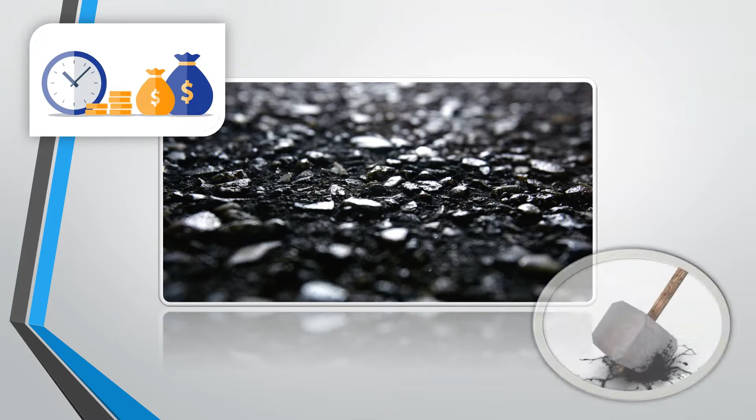Road plays an important role in the socio-economic growth of every nation. It is commonly used to facilitate the movement and transport of goods and people, and therefore it is very important to assure and deliver high-quality pavement materials. Asphalt, as a material used to paving roads, generally exhibits great benefits when it comes to cost and durability. Thus, improving asphalt properties is vital to withstand high load impact of vehicles and severe weather conditions.

The use of asphalt materials was prominent over 5,000 years ago, where it was known to be the derivative of high boiling point of petroleum. Over the past centuries, asphalt has been utilized for waterproofing, caulking, adhesive, and most commonly as a mastic in construction.

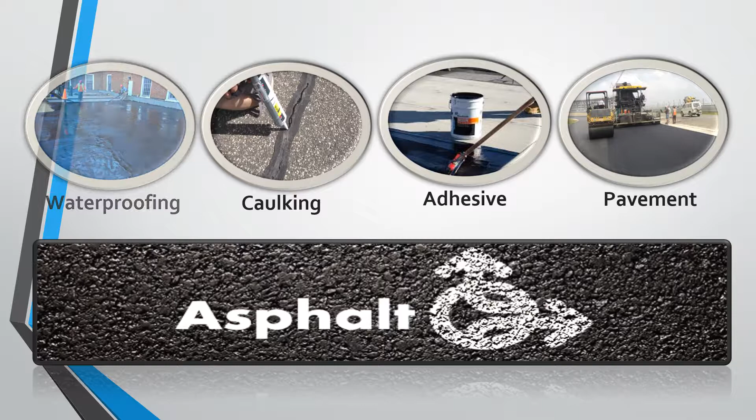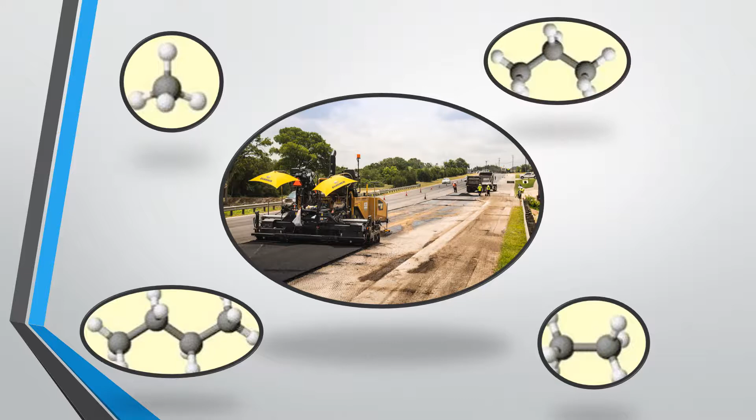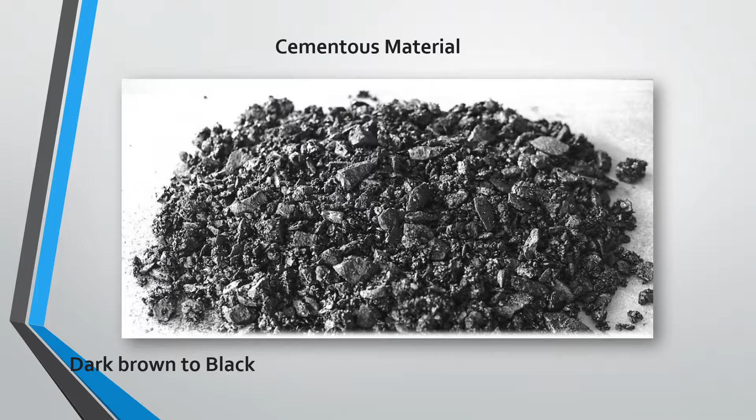Asphalt materials plays an important role in road construction. It was termed as a flexible pavement and exhibit extraordinary chemical and physical properties. Generally, an asphalt binder is composed of complex mixture of hydrocarbons of different molecular weight. The American Society of Testing Materials described asphalt as a dark brown to black cementous material in which commonly its composition is bitumen, which occur naturally or by processing of petroleum.

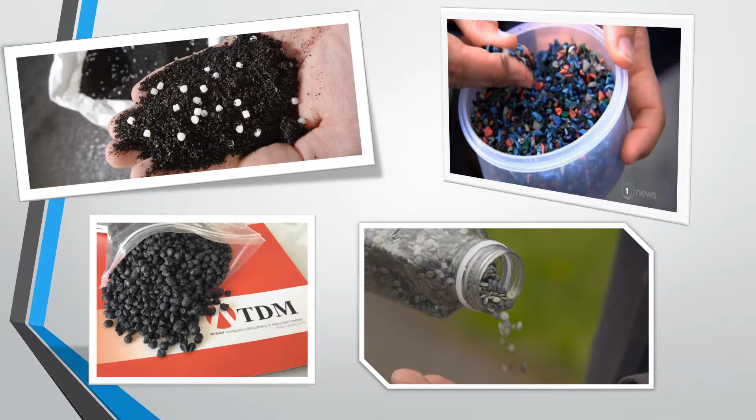Different studies has been conducted to cater a more reliable asphalt that can endure large stress from heavy traffic and to provide an easier way to maintain and repair the defects of asphalt pavement. Additional various materials to improve asphalt durability and fatigue resistance has been studied over time.

Nanotechnology had become a trend in the improvement and modification of asphalt properties in microscopic scale. Adding nanoparticles normally increases asphalt viscosity and improves its rutting fatigue resistance. Some most commonly used nanomaterials are nanoclay, nanosilica, and nanotubes.

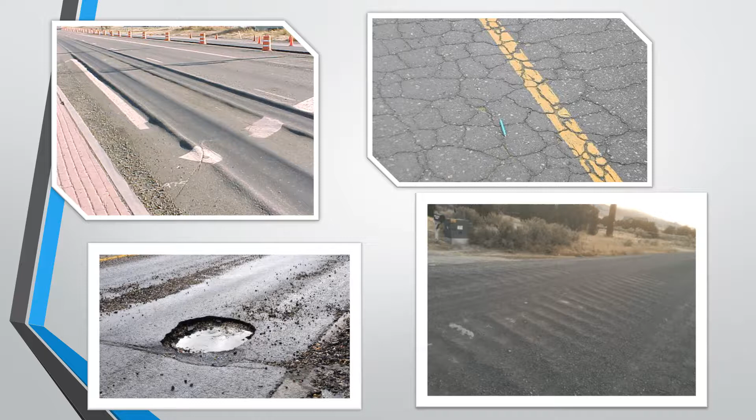The effort in maintaining high quality asphalt pavement had become the greatest challenge in road engineering nowadays. Due to high volume of traffic and erratic weather conditions of the country, pavement deterioration and dilapidation become the greatest problem of the government's Department of Public Works and Highways. Asphalt defects such as potholes, raveling, alligator cracking, rutting, and shoving are due to asphalt's inability to withstand mechanical stresses and poor material quality. To address this problem, advancement of asphalt technology had emerged, and one of these is nanotechnology on asphalt.

Many studies focus on improving the chemical and mechanical properties of asphalt using nanomaterial, and one of the most interesting innovation to asphalt is its self-healing characteristic.

Self-healing is a process by which a material tends to repair the damage induced by different type of stresses. According to many studies, self-healing is the asphalt's intrinsic response to eliminate damaged cracks and subsequently bring fractional recovery of its original properties. Basically, there are two types of self-healing, namely extrinsic and intrinsic.

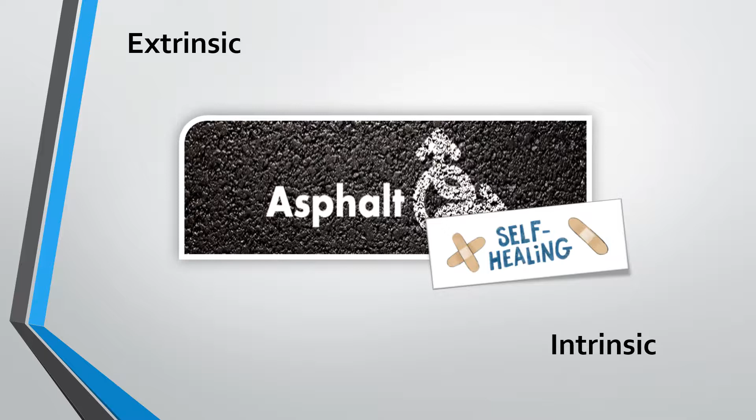Extrinsic self-healing are materials that heal through encapsulation of a healing agent, like microcapsule, within a material matrix which is released after cracking. On the other hand, the intrinsic self-healing is a material's ability to recover its properties in the presence of reversible chemical bonds.

Graphene oxide is well known for its unique properties and numerous applications in the field of chemistry, physics, and material science. GO is basically a two-dimensional material obtained from graphene backbone by incorporating several oxygen functionalities. Oxygen and carbon atoms are covalently bonded, resulting into a sp3 hybridized state. It is a nanomaterial that is determined by having abundant oxygen functional groups on its surface such as epoxy, hydroxyl, and carboxyl group. Its properties are observed to be greater than its original parent graphene, resulting into further potential application.

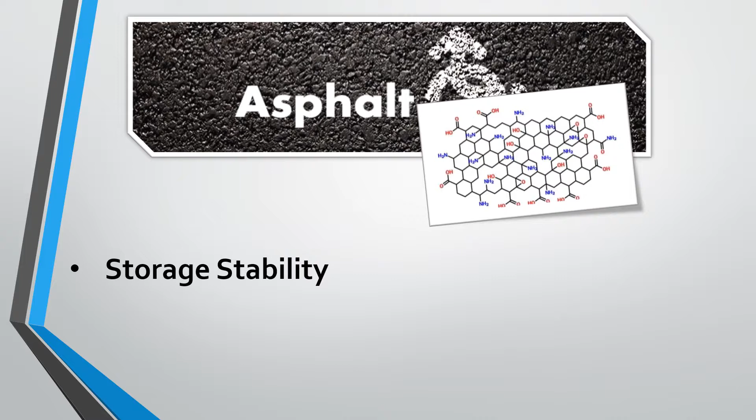There are many studies about the possible incorporation of graphene oxide in different asphalt mixes. The asphalt with GO exhibits better storage stability and an increase in softening point and viscosity. It improved the fatigue resistance of ordinary asphalt and exhibit an anti-cracking performance and high resistance to rutting and shoving.

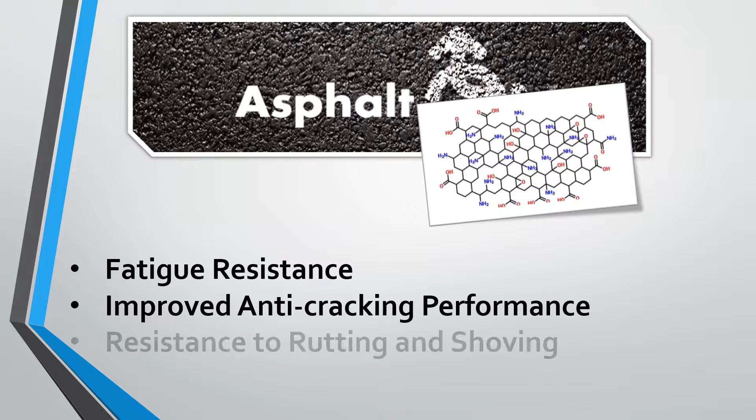Though various studies had arisen regarding the possible contribution of graphene oxide in asphalt technology, it is still necessary to further evaluate its ability to promote intrinsic self-healing in asphalt mixes. Furthermore, a comprehensive study and evaluation on the mechanical properties of graphene oxide modified asphalt must be taken into consideration.

So the main objective of this study is to evaluate the mechanical properties and self-healing capability of graphene oxide modified asphalt mixes, and how each factor such as temperature, aging, moisture susceptibility, resilient modulus, and rutting resistance can be correlated with the intrinsic self-healing capability of GO-modified asphalt.

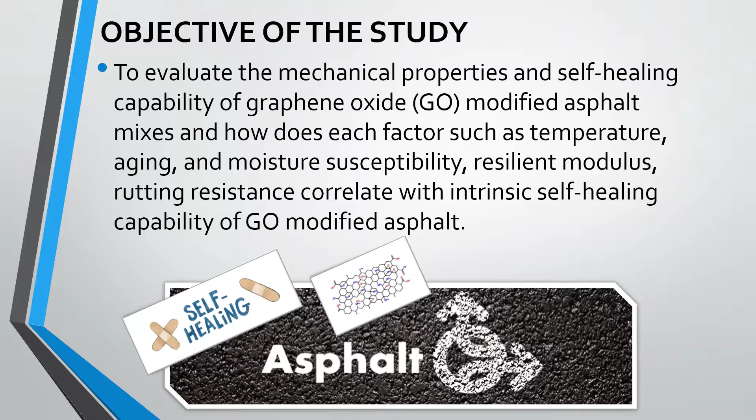To carry out the objective of the study, here are the materials, methodology, and the design of experiments that will be used in the study.

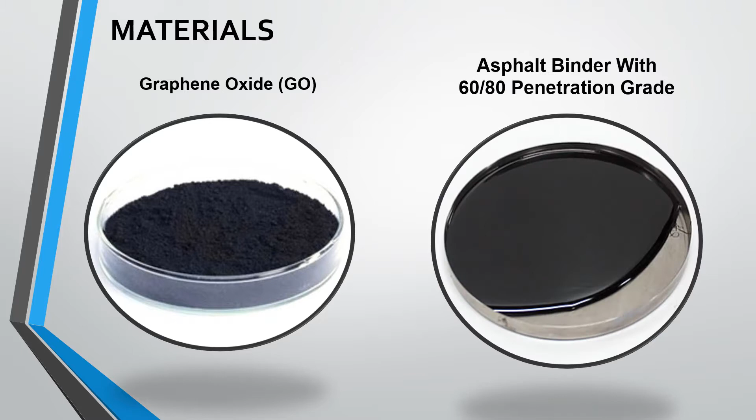The study will synthesize graphene oxide using Hummer's method. Initially, 2 grams of sodium nitrate will be mixed into 50 ml of sulfuric acid and kept in an ice bath with continuous stirring for 2 hours.

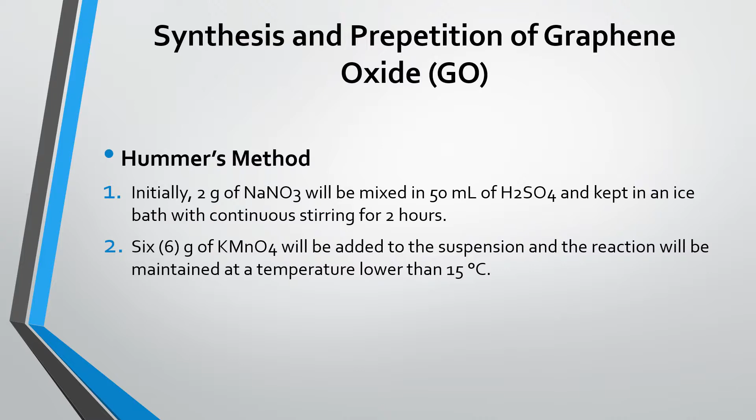6 grams of potassium permanganate will be added to the suspension and the reaction will be maintained at a temperature lower than 15 degrees Celsius. The mixture will then be stirred at 35 degrees Celsius for 2 days and produce a brownish paste. Dilution of the paste with 100 ml of water will cause the temperature to rise to 98 degrees Celsius and produce a lighter brown color.

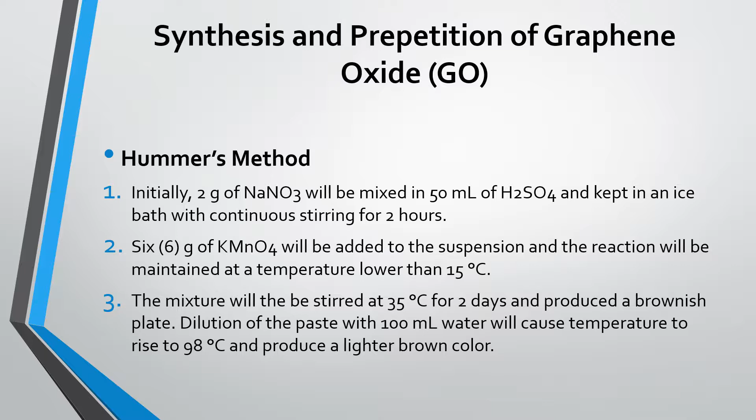200 ml of water will be added. 10 ml of hydrogen peroxide will be added to terminate the reaction, which will be confirmed by the appearance of a yellow color. The mixture will be washed and filtered with 10% hydrochloric acid and deionized water several times to achieve neutral pH. Subsequently, the final product will be dried and the GO will be obtained in powdered form.

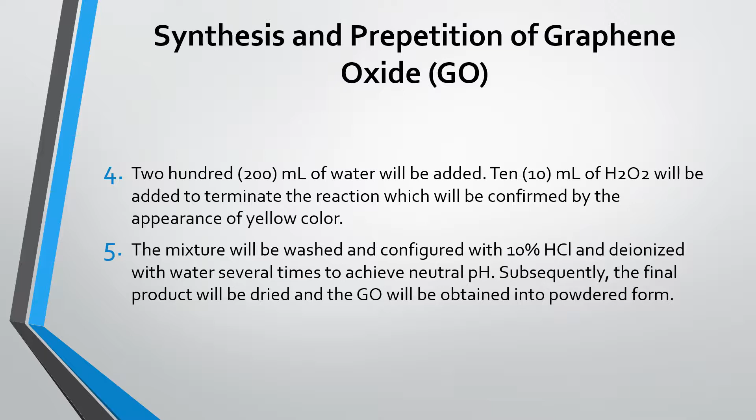The morphology and chemical structure of GO will be observed using a scanning electron microscope.

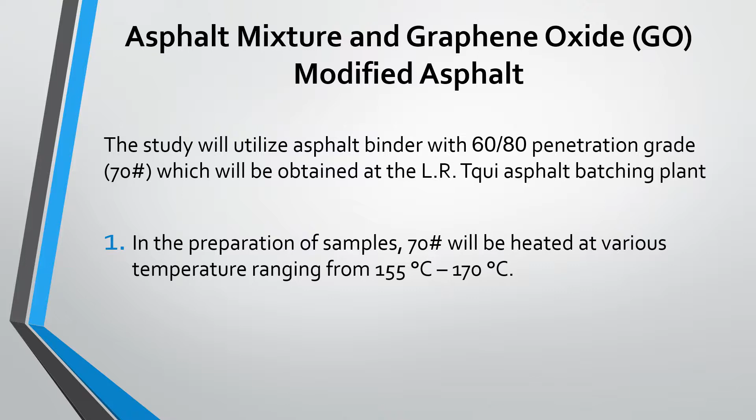The study will utilize asphalt binder with 60 to 80 penetration grade, which will be obtained at the L.R. Tqui Asphalt Batching Plant in Bulacan. In the preparation of samples, Asphalt 70 will be heated at various temperatures ranging from 155 to 170 centigrade. The GO powder will be dried in a vacuum container and added to the asphalt binder with a content ratio of 0.5% to 1.5% by the weight of the binder.

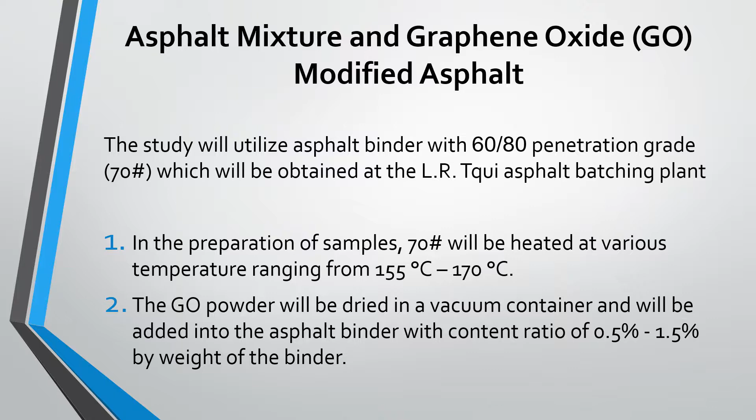In order to determine the storage stability of the GO-modified asphalt, a segregation test will be used. The asphalt binder will be poured into an aluminum tube container and stored in a vertical position for 48 hours at 163 degrees temperature. It will then be cooled at 7 degrees Celsius for 4 hours and divided into 3 segments of equal parts.

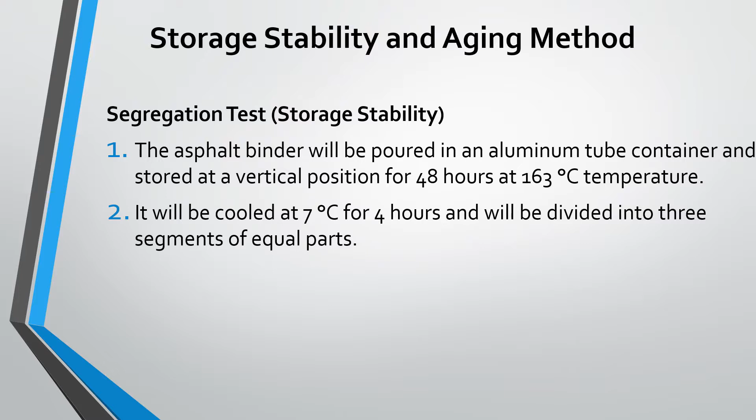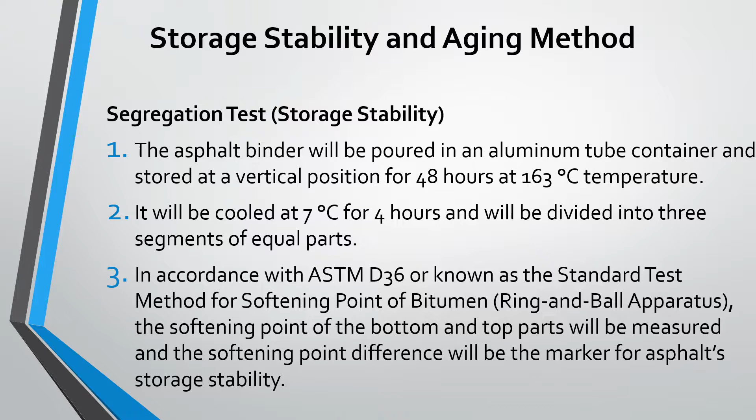In accordance with ASTM D36, known as the standard test method for softening point of bitumen using ring and ball apparatus, the softening point of the bottom and top part will be measured, and the softening point difference will be the marker for asphalt storage stability.

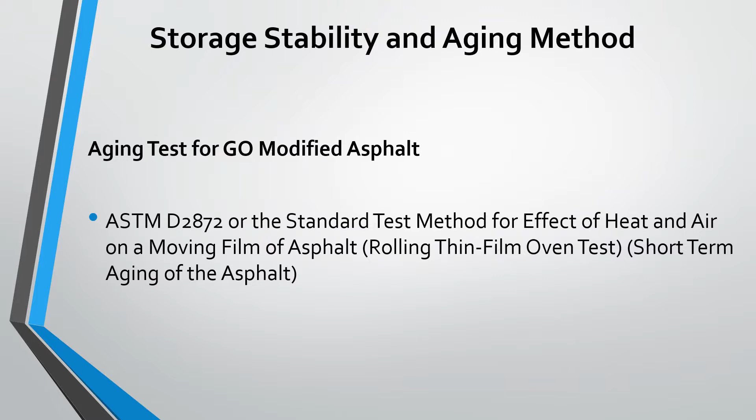In order to assess the aging of the GO-modified asphalt, ASTM D2872, the standard test method for the effect of heat and air on a moving film of asphalt, also known as the rolling thin film oven test, will be used to assess the short-term aging of the asphalt. On the other hand, UV aging tests will be used to assess the long-term aging of the asphalt. The aging time of the test will be set up into 3 to 12 days.

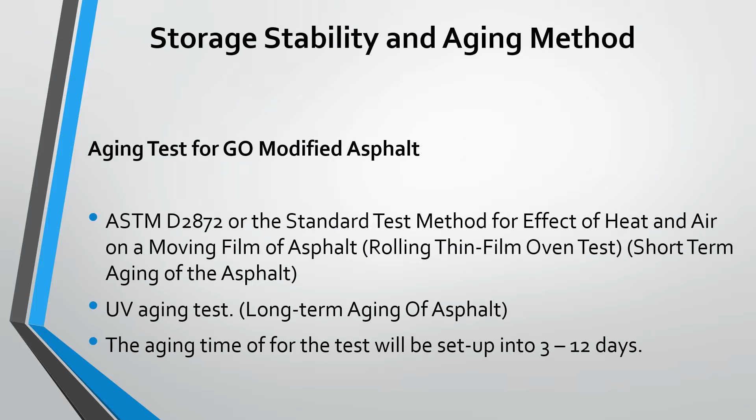In order for us to have simpler experimentation, factorial design will be used in the study. A 2 to the third factorial design in the determination of the effect of heat and air on moving film of asphalt will be utilized.

We are considering three factors: the amount of GO in the asphalt mix, the setup duration, and the sample heating temperature. We will set the levels into two, namely for the GO asphalt mix, 0.5% for the low and 1.5% for the high.

For setup duration, the low will be 3 days and the high will be 12 days. And for the sample heating temperature, we'll have the low at 155 degrees Celsius and the high at 170 degrees Celsius.

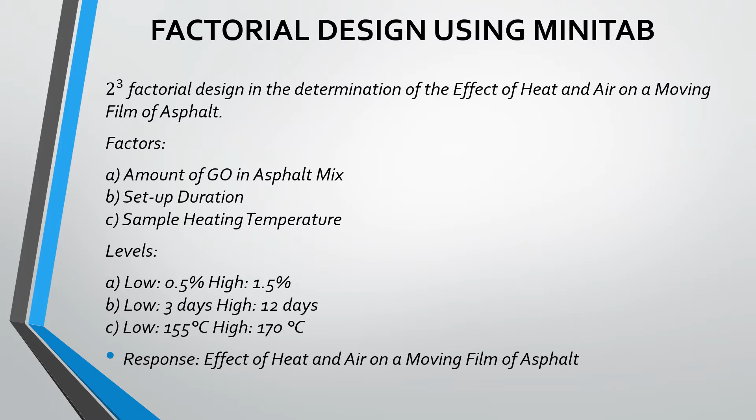We will consider the response as the effect of heat and air on moving film of asphalt. Based on the results of the Minitab analysis, there will be a total of 8 runs in order for us to obtain the necessary equation and the interaction between the factors.

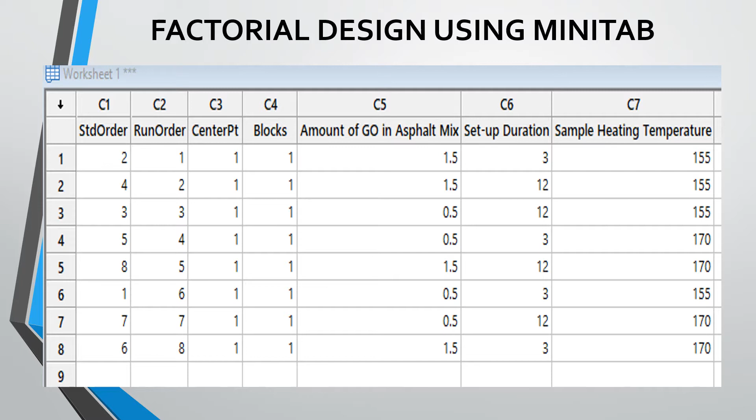In order to assess the surface energy of the GO-modified asphalt mix, the sessile drop method will be used. Probe liquids with known surface energy, such as distilled water, glycerol, and methylene chloride, will be utilized in the experiment.

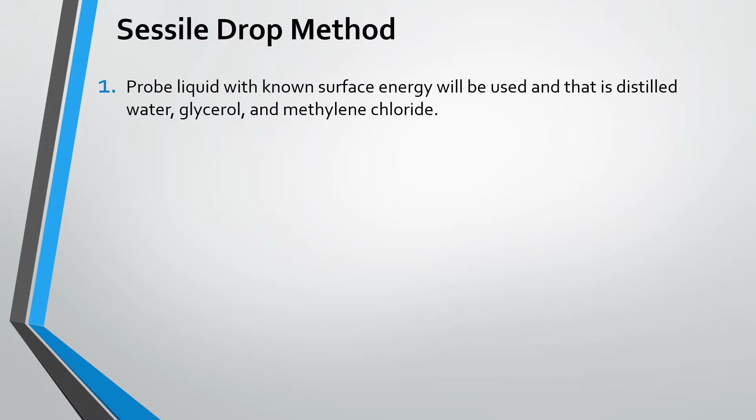The test specimen, asphalt binder, will be prepared by dipping the glass slide into the hot virgin bitumen and aged bitumen. The slides will be placed in a slide shelf and placed in a desiccator before the test.

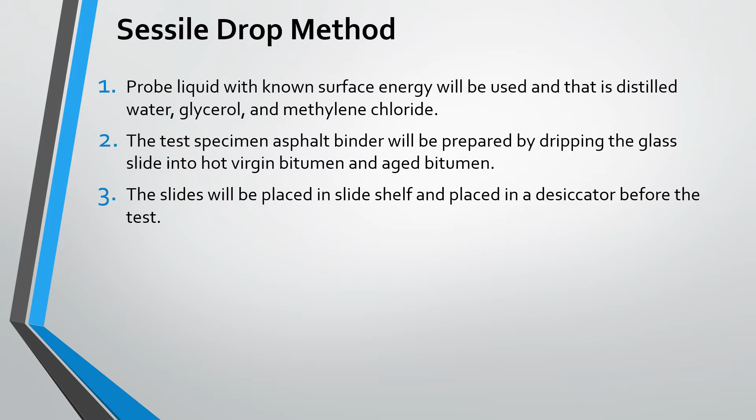The surface of the aggregate will be smoothed using an abrasive paper. It will be washed using alcohol and distilled water and dried in an oven.

After the preparation of the samples, each probe liquid will be dropped on 5 different locations on the surface of the sample, and then the resulting contact angle will be measured.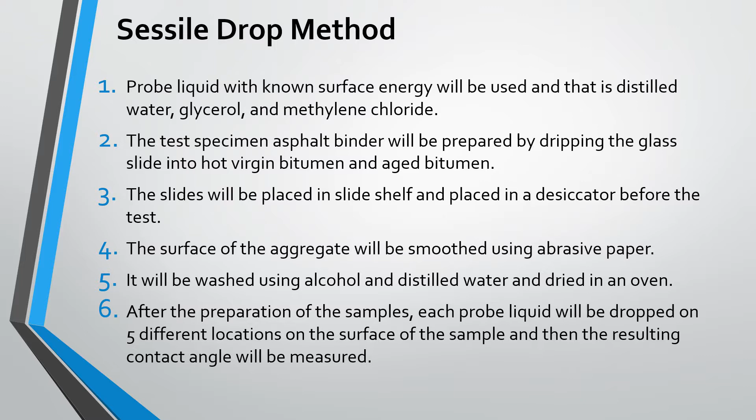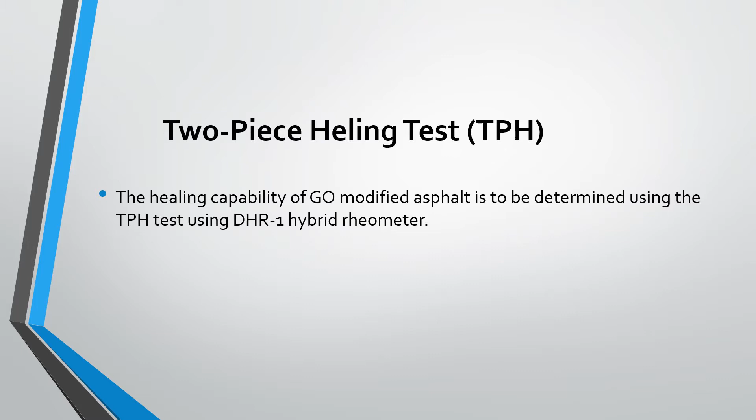The healing capability of GO-modified asphalt is to be determined by the two-piece healing test, or TPH, using the DHR1 hybrid rheometer. In order to assess the rutting resistance of the GO-modified asphalt, rutting potential using the asphalt pavement analyzer of AASHTO TP6303 will be utilized.

8,000 cycles of the asphalt pavement analyzer will be done to evaluate the rutting susceptibility of the GO-modified asphalt mixture. The test will be conducted at 52 degrees Celsius.

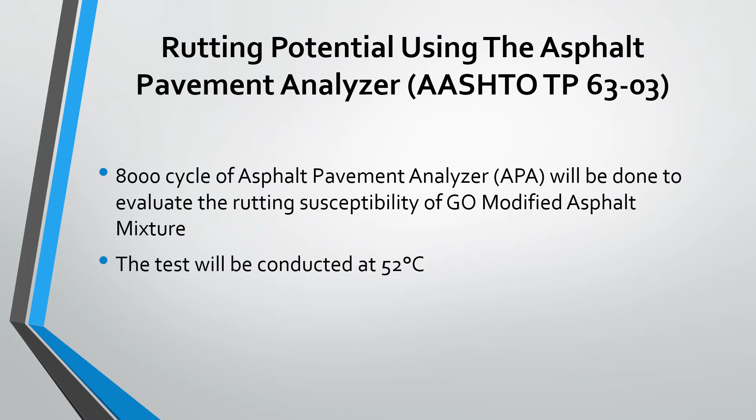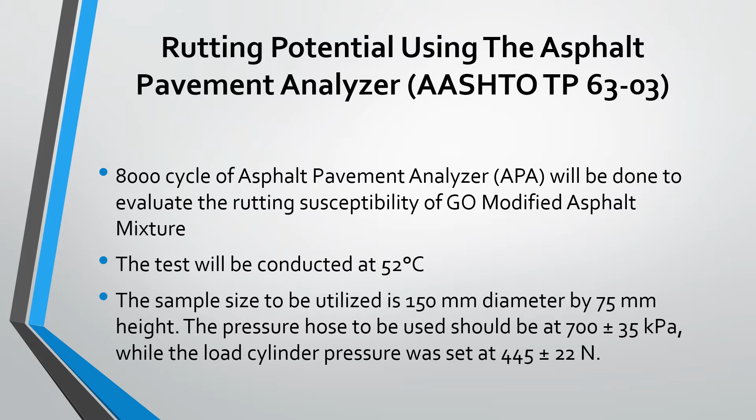The sample size utilized will be 150 mm diameter by 75 mm height. The pressure hose used should be at 700 plus or minus 35 kPa, while the load cylinder pressure was set at 445 plus or minus 22 newtons.

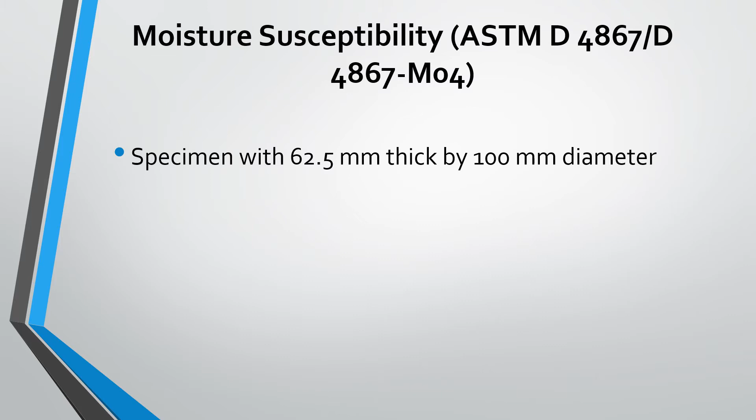The moisture susceptibility of GO-modified asphalt will be assessed using ASTM D4867. The specimen with 62.5 mm thickness by 100 mm diameter will be used. It will identify the effect of water on the tensile properties of GO-modified asphalt.

It will determine the behavior of the mix under the freeze-thaw cycle as the temperature fluctuates between a maximum of 52 degrees Celsius and 34 degrees Celsius, with the application of diametrical load at 50 mm per minute.

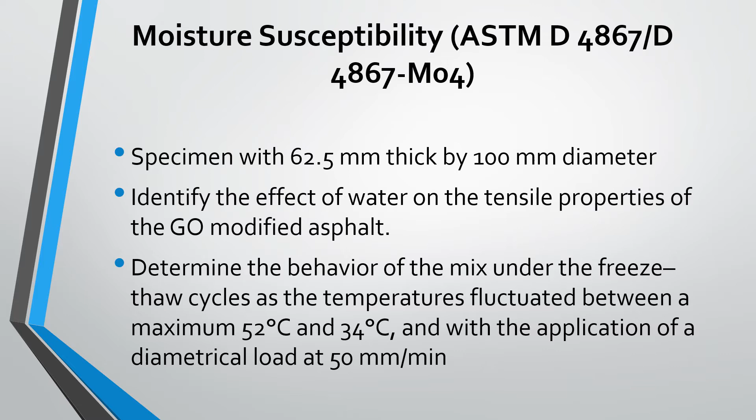In order for us to identify and evaluate the resilient modulus of GO-modified asphalt, the indirect tensile test for resilient modulus of ASTM D4123 will be used.

A 50 mm thickness by 150 mm diameter sample will be prepared. The samples will be tested at temperatures ranging from 5 degrees to 40 degrees Celsius.

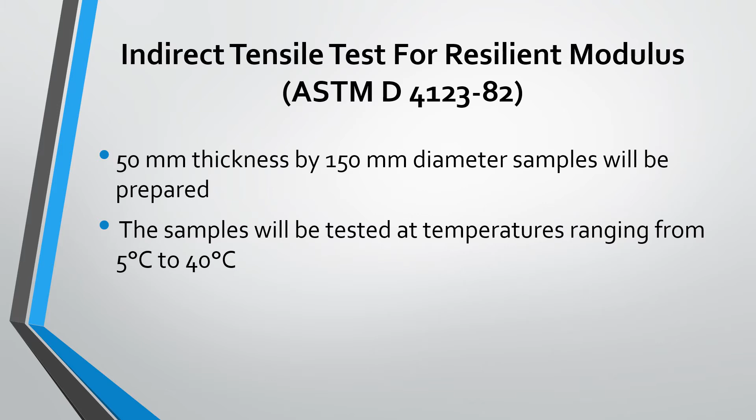The Poisson's ratio condition was assumed to have a value that varies from 0.3 to 0.4 at temperatures from 5 degrees Celsius to 40 degrees Celsius.

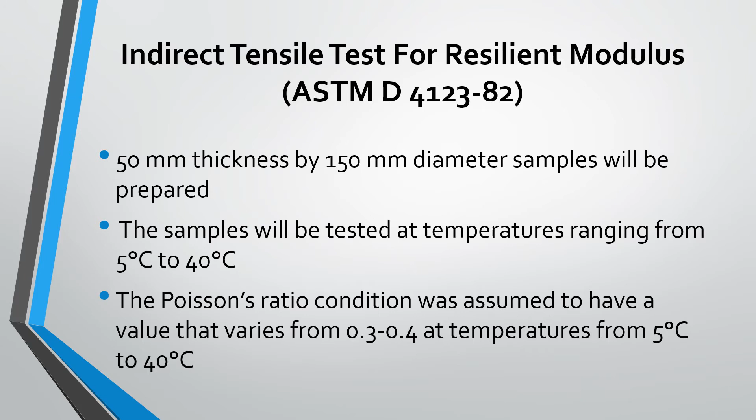Again, in order for us to have simpler experimentation, we will consider a factorial design of experiment. Specifically, a 2 to the 4 factorial will be used in the determination of the resilient modulus.

The 4 factors that we need to consider are the amount of GO in the asphalt mix, sample heating temperature, the testing temperature, and the assumed Poisson's ratio.

We will have 2 levels for each factor. For the first factor, the low will be at 0.5% and the high will be at 1.5%.

Second, the low will be at 155 degrees Celsius and the high will be at 170 degrees Celsius. For the third factor, the low will be at 5 degrees Celsius and the high will be at 40 degrees Celsius. And lastly, for the fourth factor, the low will be at 0.3 and the high will be at 0.4.

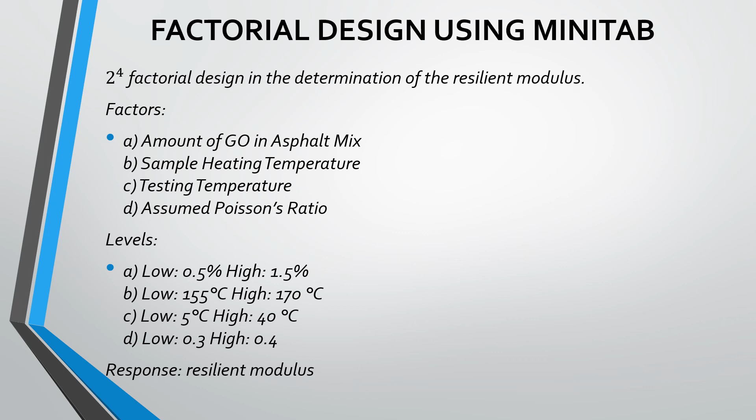The response of the factorial design will be the resilient modulus of the GO-modified asphalt. Based on the Minitab analysis, we should consider 16 runs for the experiment in order for us to obtain the necessary regression equation and the interaction of the factors that affect the resilient modulus of the GO-modified asphalt.